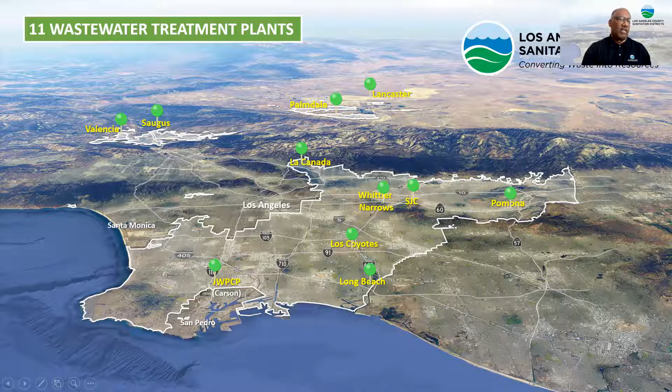So out of the 24 sanitation districts, we have 11 wastewater treatment plants. Our initial wastewater treatment plant is in Carson. Our first one came online in 1928. We call it the Joint Water Pollution Control Plant, or JWPCP. Today, we're going to focus on the Palmdale plant that you see here in the Antelope Valley. We also have a couple of treatment plants in Santa Clarita. So this will be the focus of today's virtual tour.

And what makes the Palmdale plant, as well as the Lancaster Water Reclamation Plant, uniquely challenging? Of our 11 wastewater treatment plants, these 2 in the Antelope Valley are the biggest challenge, because at the other 9 we try to recycle the water, but if we don't have takers for that recycled water, we can put it into a river or an ocean. Well, at the Lancaster and Palmdale plants, there's no river or ocean nearby, and everything flows towards Edwards Air Force Base.

And if you can see this aerial shot, you can see the closed basin. So that means that every drop of water that comes into this plant has to be accounted for, either by recycling or storage. And it makes the operation and management of the Palmdale plant, as well as the Lancaster plant, uniquely challenging. With that, I'm going to turn it over to John, and he's going to talk to you more about the Palmdale Water Reclamation Plant.

Thank you, Basil. I appreciate the introduction. All right, so I'm gonna go ahead and share my screen here with you guys.

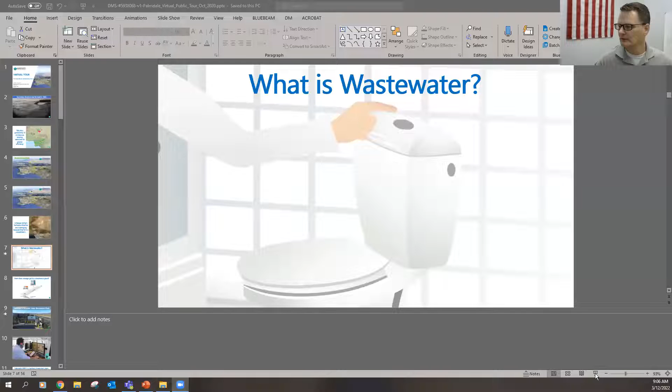And I should be unmuted. You guys see the screen okay? Yes? Yes. Awesome. Thank you.

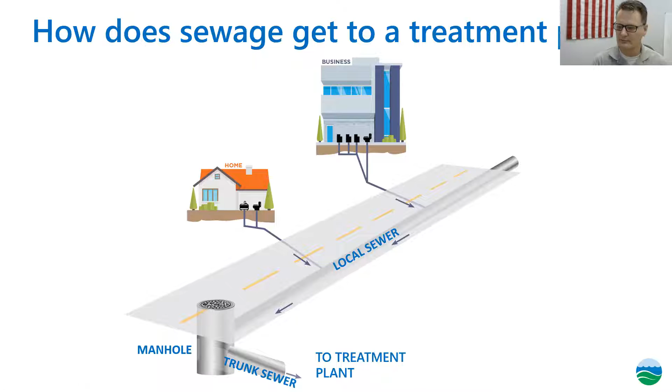And so here's a video of the Palmdale Water Reclamation Plant. A little overview. So this plant started in 1953, and the original amount of water treated was 0.75 MGD. MGD is a unit of flow, which stands for million gallons per day. So just to put a visual in your mind, if you take 140 garden hoses and flow them all at once, that's 1 MGD. And so today, Palmdale treats about 10 MGD on average.

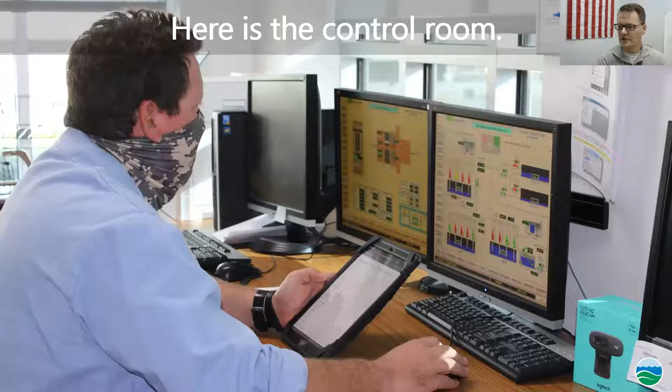All right. So start you guys off in the control room. This is an operator here holding an iPad. He's looking at a screen. If you look at the screen itself, you can see different colors, red and green and blue and black. The red means the pumps or the mechanical equipment is off. Green means that it's on. These are actually pumps that are depicted here. And this is a DCS system, distributed control system.

It's a way that an operator can control the plant from one room without having to go out to the pump and flip a switch to turn it on or off. You can also monitor the entire plant system from this DCS system and see if there's anything that may be starting to go in a direction they don't want it to, or maybe need to make some adjustments. The iPad that you see the operator holding there is used for their rounds.

So 2 times a day, an operator will walk around the plant and collect data, whether it be flow, temperature, pressure, whatever it may be. He'll collect it on this iPad and bring it back to the control room and they'll download it into a database. And then from there, we can monitor any trends or changes that may be happening in the system.

All right, so here's a schematic of the Palmdale Water Reclamation Plant. Basically in this tour, we're going to follow the water through, and we'll talk about each of these systems as we go. The first part is our primary system. Oh, by the way, there's 3 main mechanisms that are used to treat water: physical, biological, and chemical. So as we go through these systems, just think about what type of mechanism is being used to clean the water. All right, so we'll go to the primary.

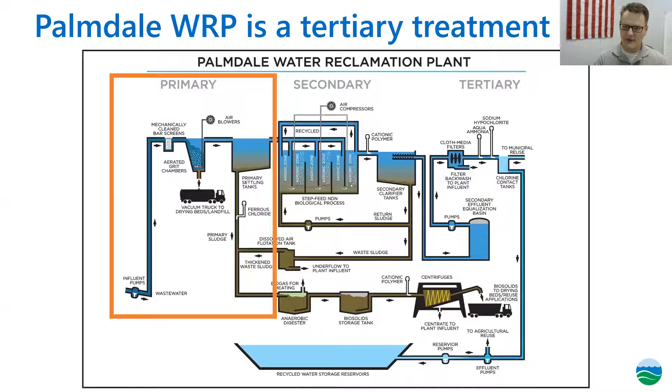All right, so I'll bring you to the influent pumps. Because the Antelope Valley is very flat and we gravity flow water to the plant, the pipes enter the plant at about 25, 30 feet below grade. And so we have to pump that water up to the surface so we can begin treating it.

And what you see on your right-hand side are influent pumps. Now, each of these pumps are rated at about 100 horsepower, and they each pump about 10 MGD. Now, you may remember that earlier I mentioned that the plant treats an average of 10 MGD, and we have 5 pumps there total. You only see 4 of them in the picture, but we have 5 of them.

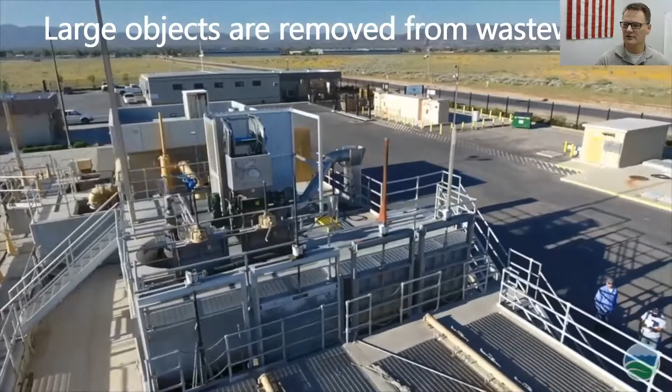Now, the plant has a lot of redundant systems throughout the plant itself, and we do that so that way if a pump goes offline, we could continue operating normally until we repair it and put it back online. So the water's pumped above grade, and then the first part of the treatment is the screening structure, as you see here. And the purpose of the screening structure is to remove large objects from the water. And we'll get a close-up of the screen itself.

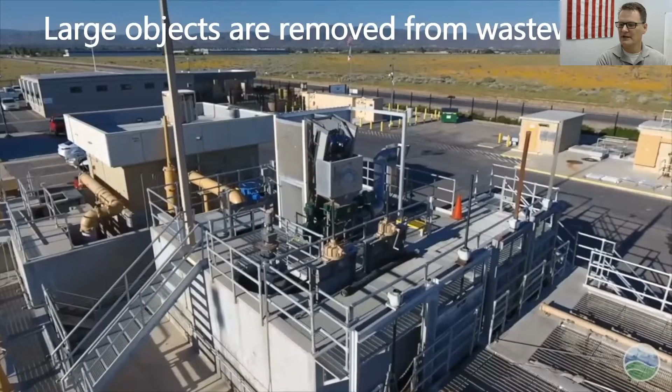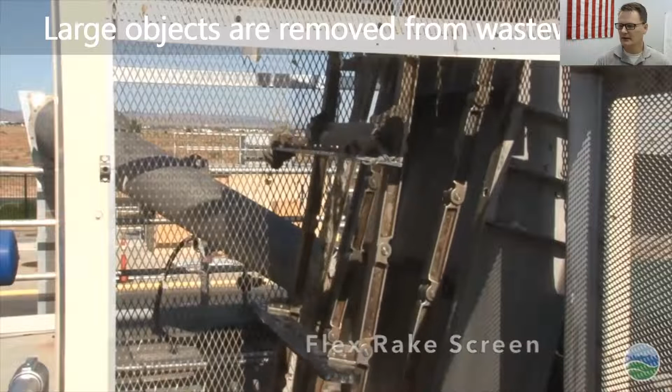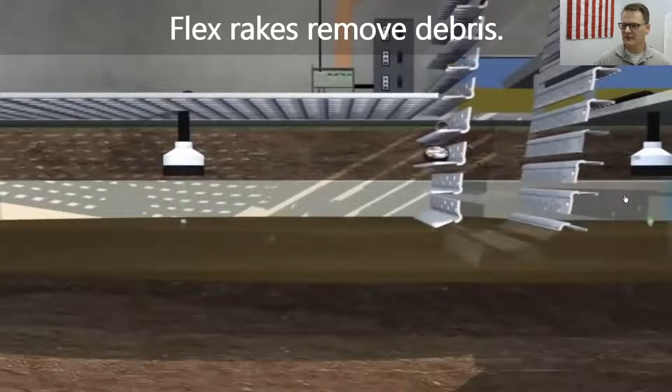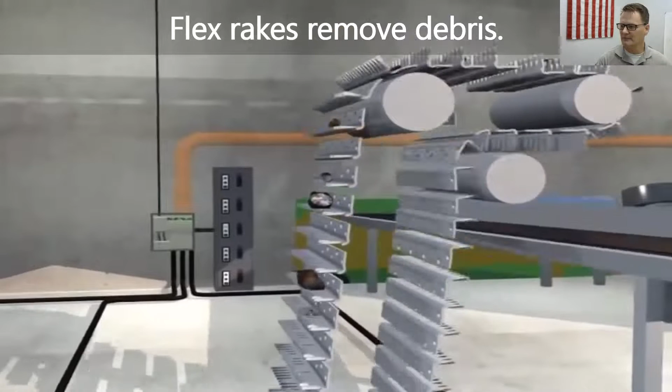Here's our flex rake. And so what happens is the water flows through this flex rake, and we've got a graphic here. It kind of shows a side view. You can see the water kind of flowing to the right, and then the flex rake kind of captures these larger objects, conveys them up. And then in this graphic, it drops it down into a conveyor belt, but we actually use a washer compactor at this particular plant. And here's what that washer compactor looks like.

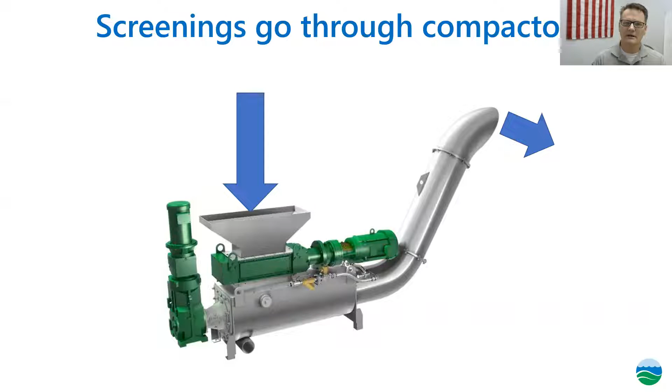So it gets dropped into that bin that you see here, and then gets compacted and pushed out to the right. And so here's what it looks like. And as you can see, there's a lot of rags in here. And we want to mention that, as you see, it's a public service announcement. We don't want to put flushable wipes down into the toilet. And the reason why is because they don't disintegrate.

And so this is an additional load or additional cost on your wastewater treatment plant. And so we want to avoid these costs if we can, because obviously those costs get passed on to our customers, which is you. And so if we could minimize the amount of flushable wipes that we put down the sewer system, that would be very helpful. Also, let me ask you this question. Maybe somebody out there knows this, but what else should we not put down into the sewer system? Anybody want to hazard a guess?

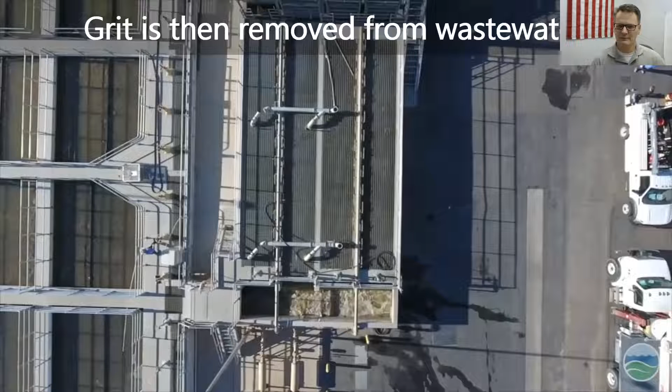All right, continuing the tour, the next step in the process is the grit chambers. We have a little video here. The purpose of grit chambers is, just as the name indicates, to remove grit.

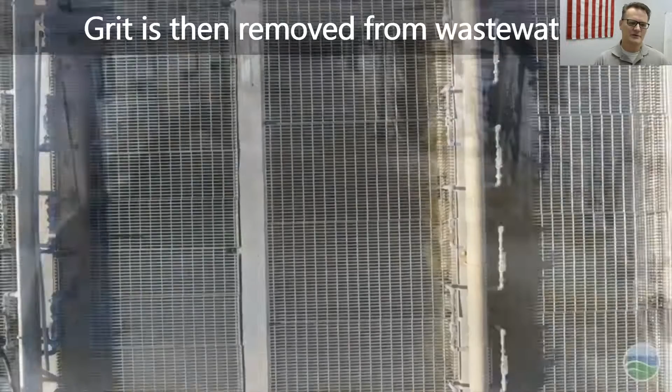If you remember at the beginning we showed a picture of the bathroom and a shower. If you shower or do laundry, you can get grit in the water, and the purpose of the grit chamber is to remove that grit. We remove the grit at this stage because we want to protect downstream equipment.

This grit is very sandy and abrasive. An analogy I like to use is if you have a bicycle chain, you don't put sand in it because that would destroy the chain and the sprockets. That's why we remove grit at this stage, so that we protect our downstream equipment.

As you saw from the video, the water moves fairly quickly. We just want to settle out the small dense particles at this stage, and then carry the water on further down the treatment system. As you can probably tell, this is a physical process we're doing at this stage.

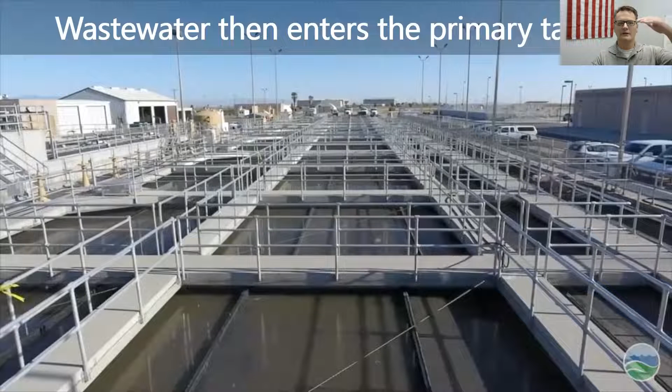All right, so next is the primary tanks. This is where we slow the water way down, and we get stuff to float and stuff to sink, so we can start to separate out the items that are in the wastewater we receive.

So you can see this overview of the primary tanks. Down here you can kind of see some boards along here. These boards are called flights, and they run on the top of the water and also on the bottom. They move very slowly, and they collect everything that floats and everything that sinks, and that's then transported over to the digesters for further processing.

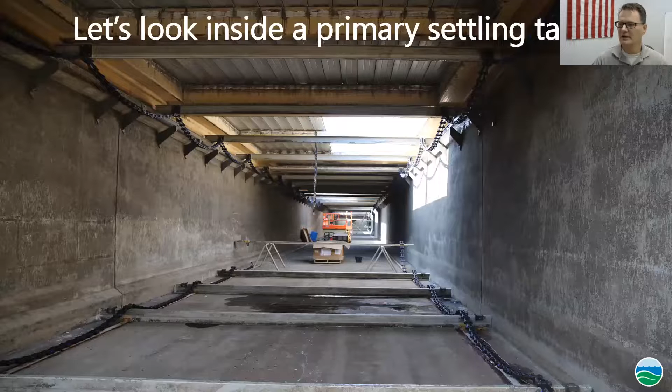I have a picture of a primary tank that's empty here. At the bottom you can see the flights, and some chains along here, a chain-and-flight system, same above. Right now maintenance is doing some work to this particular channel to keep it running.

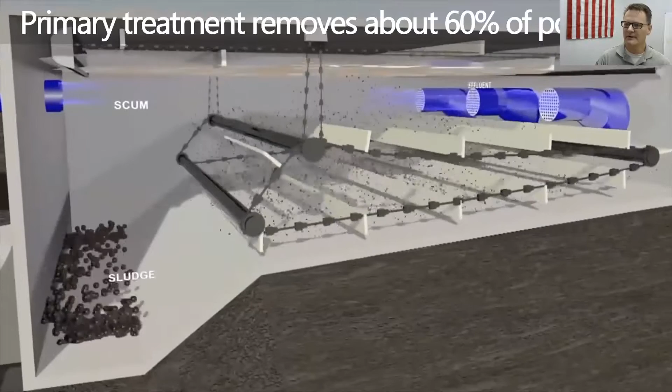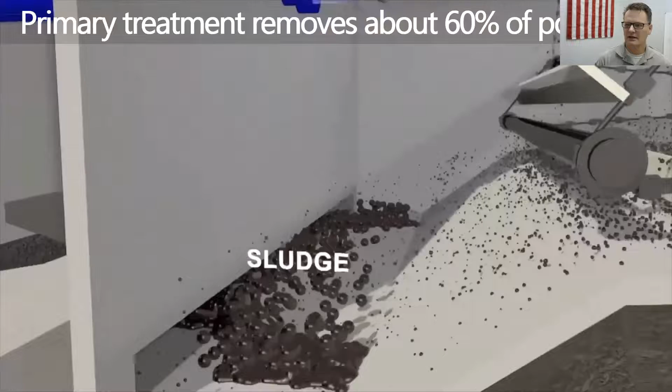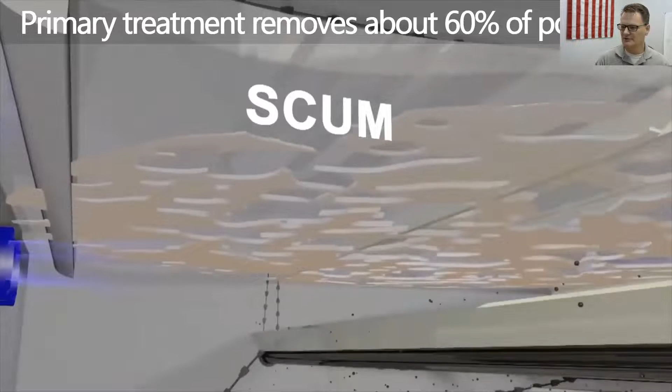I think I have a graphic also, here it is. You can see a graphic where the collection system is collecting sludge on the bottom, and also on the top, and all that sludge is then collected and transported to the digesters for further processing. We'll show you pictures of digesters and talk about that in a few minutes.

One thing I want to mention is that when people think about wastewater, they think it's yucky and disgusting. But it's really not the water itself that's disgusting, it's what's in the water that we want to remove or don't like. The process of the wastewater treatment plant is to remove all that stuff out of the water, and at the end get clean, usable water that we continue using for other sources.

Water is obviously a valuable resource, and we want to recover and use it. Water is just a conveyor, it transports our waste to the plant where we can then treat it, remove the waste, and reuse the water.

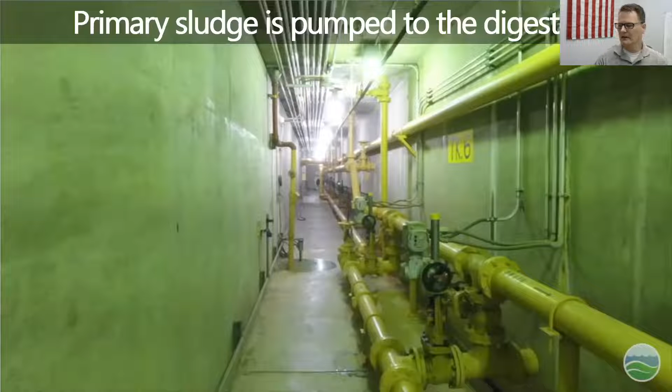This is the gallery down by the primary tanks. On the right you can see a placard, this is tank 6 that you see here. Down below you see a pipe, and that's where sludge is being collected from one of the tanks.

And so these pipes then convey the sludge over to the digesters, as I previously mentioned.

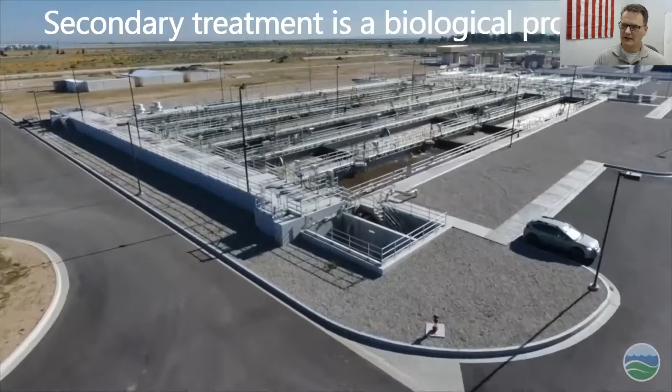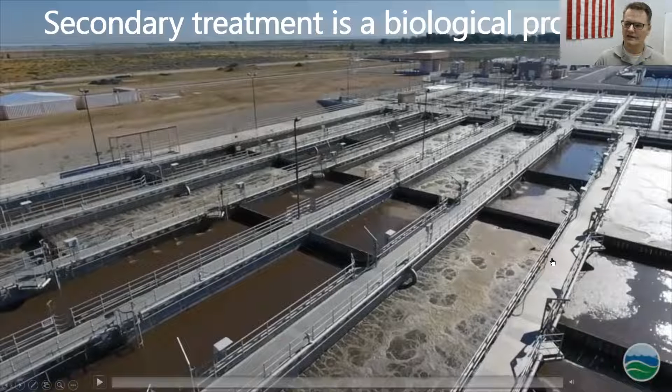Okay, so next we'll go to the secondary treatment process here. This is the biological treatment, considered the heart of the treatment plant process. As you can see, there are some tanks that are bubbling or aerated, and some that are not. This is because we use a process called the NDN process, the nitrification denitrification process, to remove dissolved waste in the wastewater.

At this stage, we have done all of our physical processes that we could, and now what we have is dissolved waste in the water. So to remove this dissolved waste, we employ microbes to go in and eat the waste. We have a variety of microbes that go in and eat the waste, removing it from the water itself.

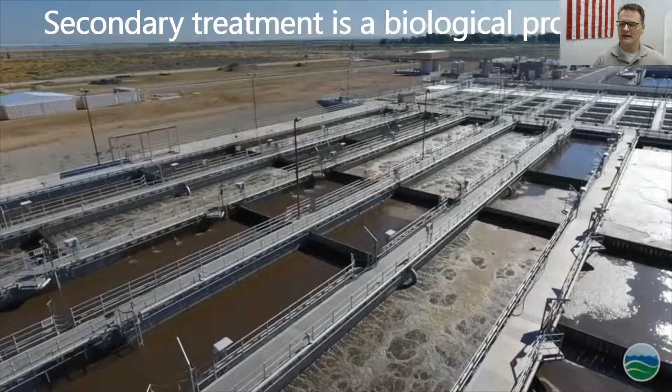On this NDN process, we have some tanks that are aerated and some are not, because we're trying to promote growth of certain types of microbes that do certain types of work. We want to nitrify our ammonia, then denitrify it, and eventually convert it into nitrogen gas, to where it's no longer an environmental issue at all. The water spends about 4 hours in this process.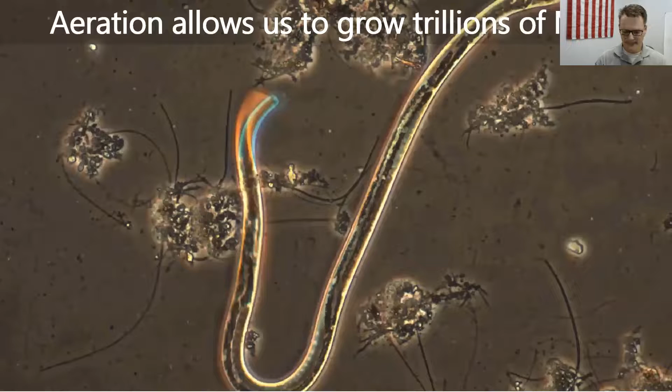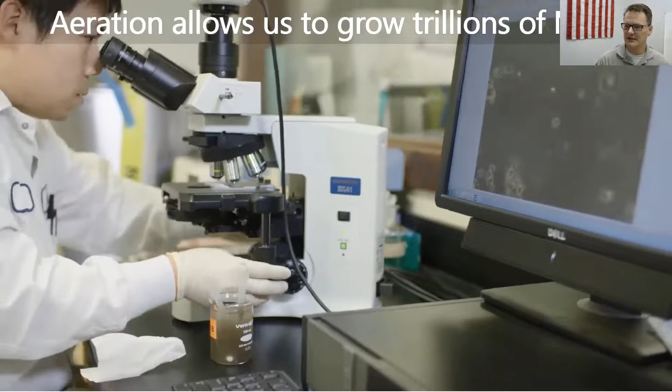Here you see a lab technician looking at the microbes. You can look at the microbes and actually tell the health of your sludge just by seeing the variation you have. You want many different types of microbes in your wastewater treatment plant, because there are many different types of waste that the plant receives, and you want those microbes to eat that waste.

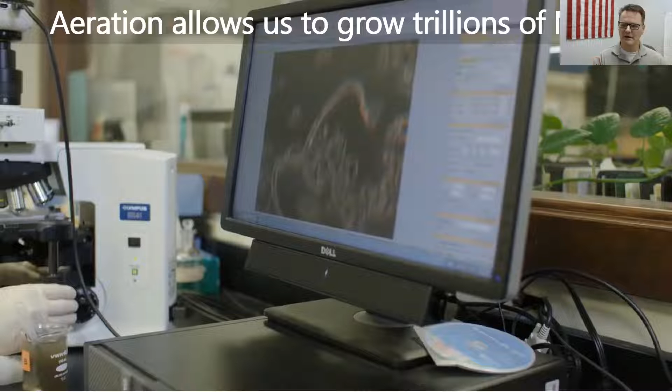An analogy I commonly use is like at a buffet. If we all go to a buffet, we all like different things—some people like pizza, some like salad, and we'll gravitate to those types of food. These microbes gravitate to the types of waste they like first and eat that up. So if we have a variety of microbes in there, we can get all our waste taken out of the waste stream.

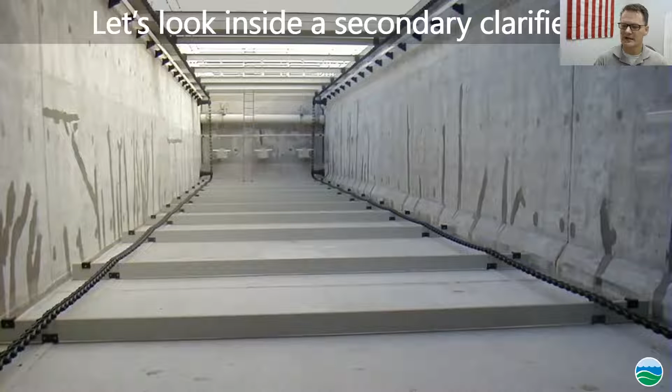Here's the inside view of the tank. As you can see, it's very similar to the primary tanks you saw earlier. You've got the chain and flight system, and these boards—they go on top of the water, and also underneath, and they collect the microbes.

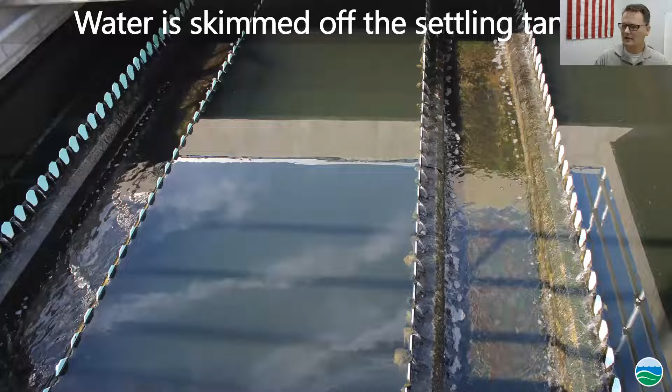And here you can see the water being skimmed off. So in the secondary settling basin, just like the primary settling basin, we slow the water way down. We want these microbes to settle out, and lucky for us, they're just a little bit heavier than water. So we settle them out, and we slowly skim the water off the top from there out.

Even at this stage of the process, the water is fairly clean. Here's a picture of the water that has been skimmed out of the secondary settling tanks.

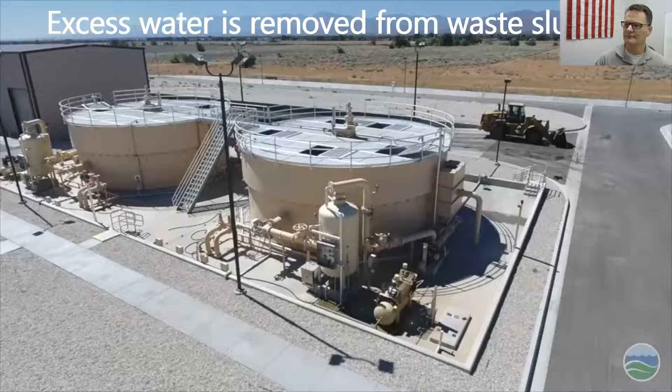The microbes that are taken out are then sent over to these DAFs, the dissolved air flotation units right here. The purpose of the DAFs is to remove the excess water. From here, they go to the digesters. We want to remove the excess water because we don't want to take up space in our digesters with that water—we want to use all the space for treating the microbes.

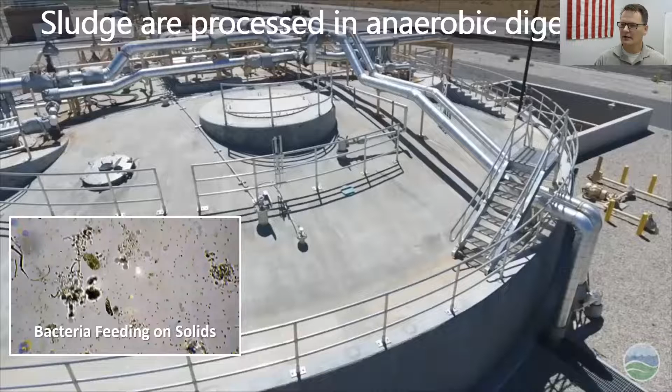Here's the digester itself, and you can see a video of the bacteria feeding on the solids in the lower left-hand corner there.

You see a lot of pipes in the digesters. These pipes serve different purposes: some are conveying sludge to the digesters, some are conveying sludge out, and some are collecting gas like methane that's produced. That methane is then reused in our boilers to reheat the digesters. We keep the digesters at about 98 degrees, and that helps digest the solids we collect.

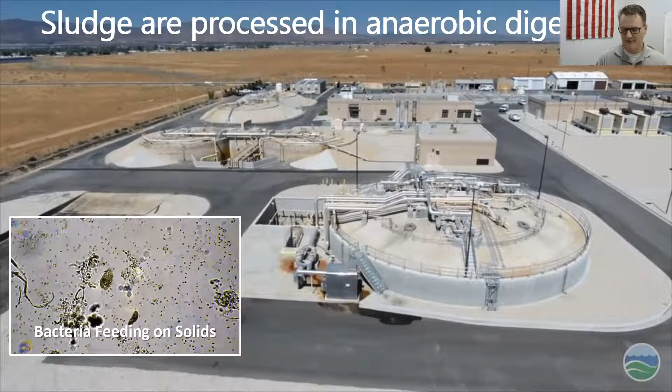After the digesters, the sludge is sent to the dewatering building where it is dewatered. There are two purposes for this. The first is to reduce the volume by removing the water. The second reason is that water is weight, and we have to transport the solids out. We don't want to pay hauling costs for hauling water out. We only want to haul out the solids.

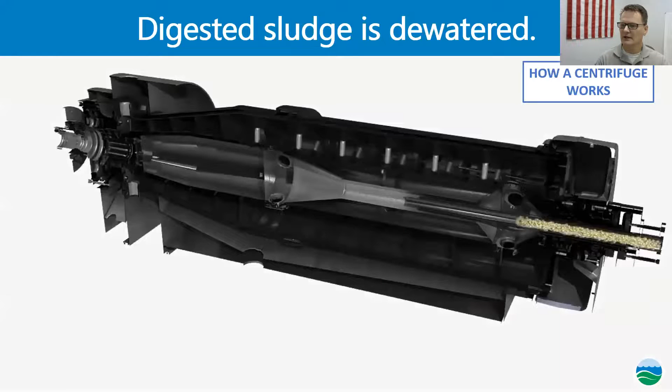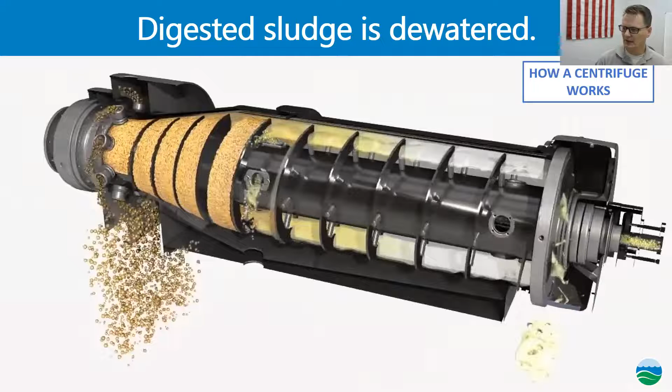Here's a video on how the dewatering centrifuge works. The sludge enters on the right and goes down. It's spun really, really fast, kind of like your washing machine on spin cycle, except it spins much faster. The solids are pushed out to the front, and the water to the right. The water that comes out is called centrate, and that's pumped back to the front of the plant for additional processing.

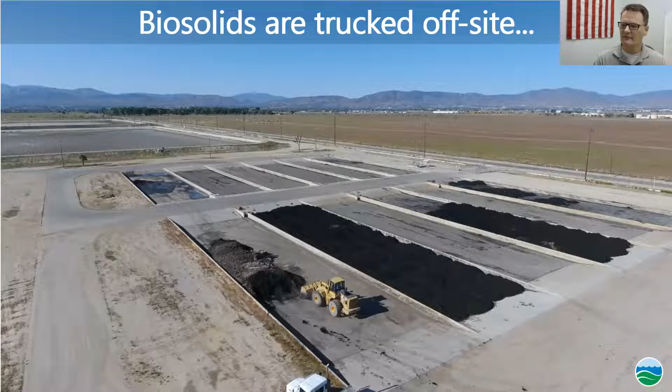The biosolids are then collected and stored at our 40th Street property, where you can see the piles of biosolids. They're stored there for a period of time, and eventually they're hauled off and composted, as you can see here. So it's beneficially reused.

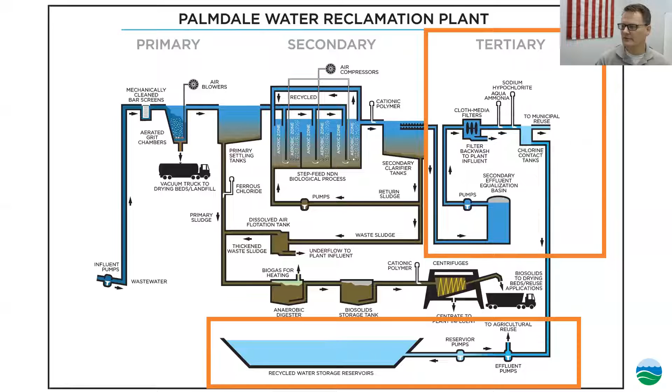Next we're going to go on to the tertiary part of the treatment plant. Here we have the equalization basin. Got a video of it here, and that's a 5 million gallon tank.

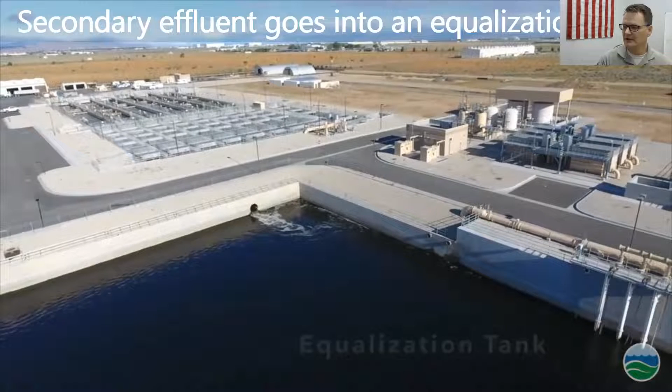The purpose of the equalization basin is, just as the name says, to equalize the flow. The wastewater treatment plant typically sees highs and lows of water coming in throughout the day. It's all based on human activity. During the day, people get up to take showers and eat breakfast, getting ready for work, so we see an uptick of water coming in. Later in the day when everyone's at work, the water may go down, then go back up again when they come home and are taking showers or eating dinner. So the water goes up and down.

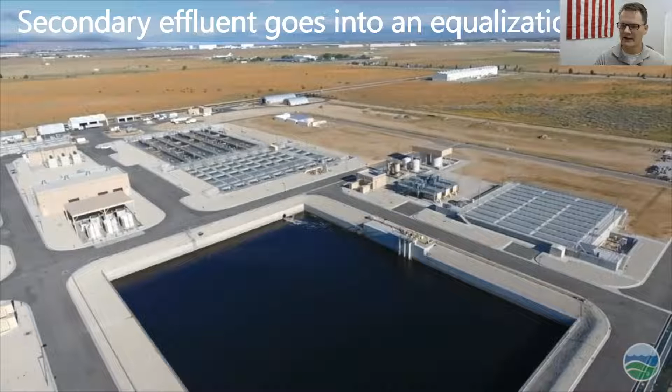The secondary equalization basin serves two purposes. One is that it can be emergency storage. If we have an issue on the back half of the plant where something breaks and we need to store water temporarily while we do a repair, we can use this basin as a fail-safe to store water for us.

The second reason is to smooth out that flow. Rather than having the flow go up and down, we can have a steady flow going through the second half of the plant. This matters because when we do disinfection, we want to disinfect to a certain point and maintain that level. If the water is going up and down, we're always chasing it. But if it's steady state, we can zoom in on it, which helps save money on chemical costs and makes it easier for operators to run the plant.

So I got a quick question for you guys. What do you think is the busiest day, or the day we get the most flow at the wastewater treatment plant?

We got Jackie and Juan saying Super Bowl Sunday, and Lily saying holidays. Yes, there are two big days for us. One is Thanksgiving, since families get together, doing a lot of cooking and activity, so we see a higher amount of flow that day. Also during the Super Bowl we see a lot of flow, and you can even tell when it's halftime because there's a little uptick then. Barbara asked about Mondays. That's a good question. I'd think Mondays see more people going back to work than, say, a Tuesday, Wednesday, or even a Friday. Janine, what do you think? Do we see a bit more flow on Mondays than on a Friday?

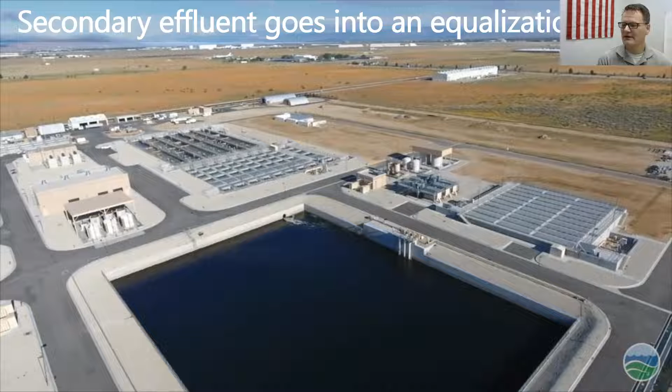After the secondary equalization basin, it then goes to the filtration process. We want to filter the water at this point to collect any microbe stragglers that may have made it through the secondary process, or anything that may have gotten into the water up to this point. This is right before the disinfection stage, so let's talk about the filtration.

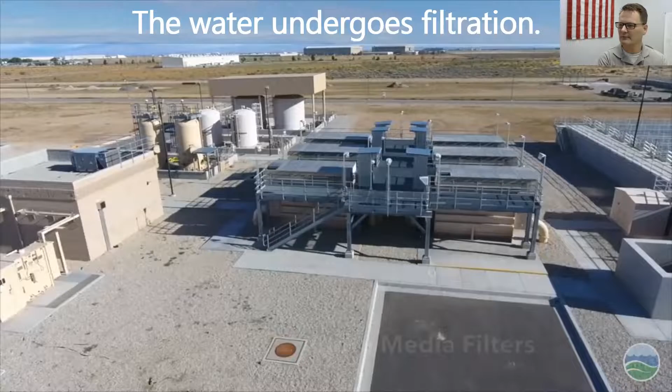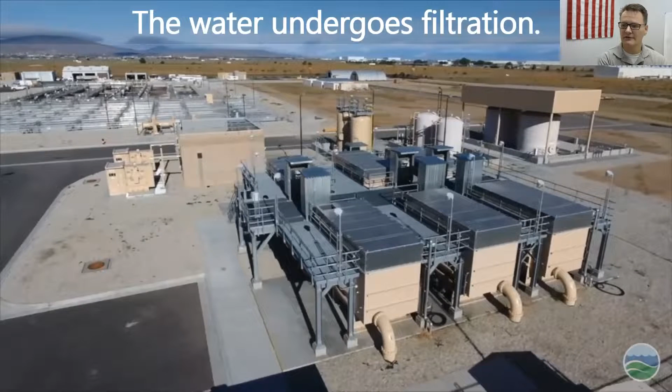At Palmdale, we use cloth media filters for our filtration. Other plants may use gravity filters or pressure filters. There's different ways of doing the same thing. So if you're in a different city and visit their wastewater treatment plant, they all do the same thing, they just do it differently.

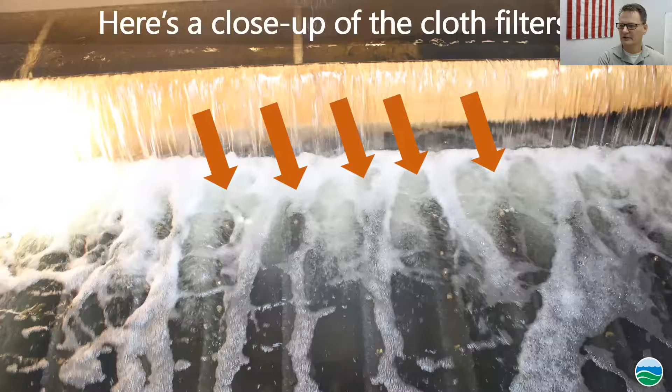Here's a close-up of the cloth filters themselves. You can kind of see the water cascading down into the filters. And I've got a video here that shows how they work.

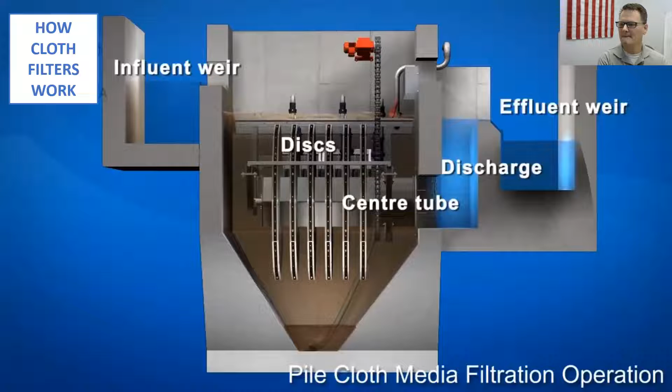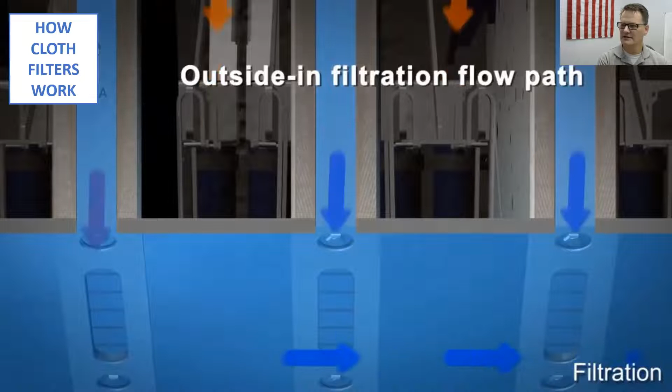The water fills up and then it goes into the filter segments, comes down, and gravity flows inside the filter itself, then through this pipe in the center, and out into the next process.

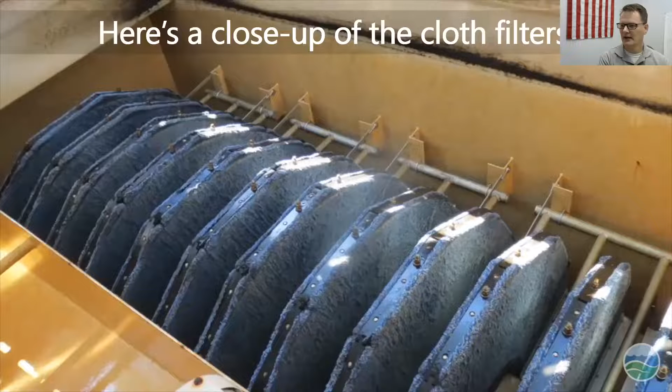Here's a close-up of the cloth filters themselves. You see they're just discs, a bunch of discs in line, and here's a close-up of what one looks like.

If you're here for a physical tour, which we plan to resume in the very near future, we bring these out and you can actually put your hand on it and see what it feels like. If you rub your hand on it, it feels very much like carpet, very soft and fuzzy.

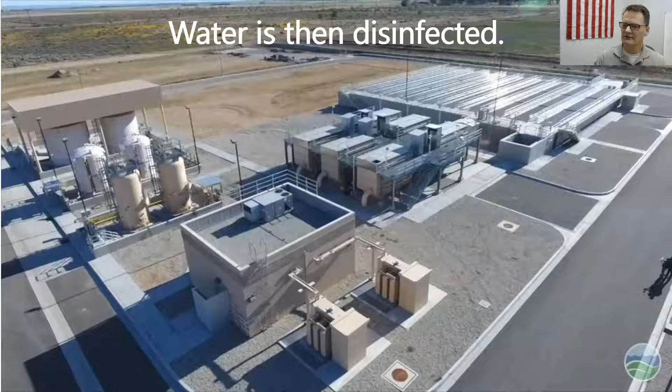All right, so after the filters, then we go to disinfection, the chlorination tanks.

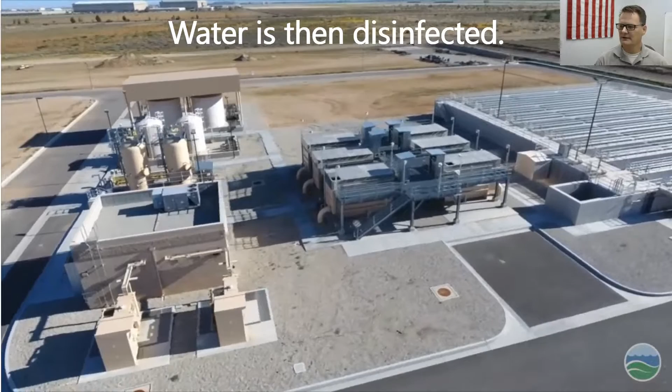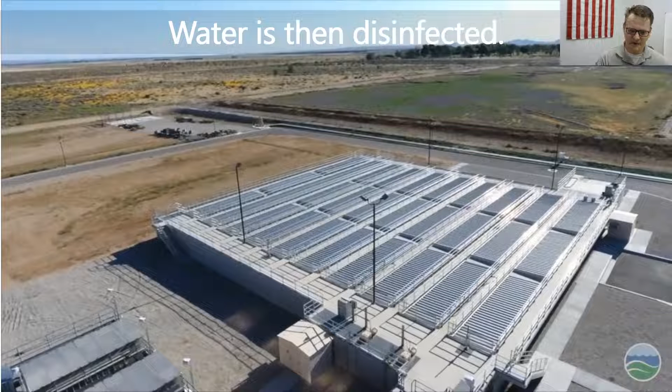Here's an overview of the disinfection tanks. The water spends roughly about 4 hours in these tanks for disinfection. We put chlorine in here and maintain a contact time, and after that contact time, the water is disinfected.

Here's another shot. Does anybody notice that we have these tanks covered, but maybe not the other tanks in the treatment process? Anybody have any idea why? Anybody want to take a guess? Anybody out there have pools?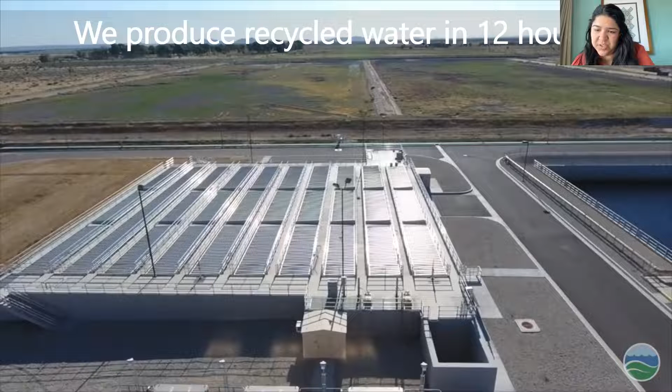So we have Juan who says the sun doesn't eat the chlorine, Ava says to prevent things from falling in, Lily says so it doesn't evaporate, and the last one says to prevent particles from going in and contaminating it. Yeah, all three. The biggest benefit is the evaporation of chlorine. Chemicals are a major cost in a wastewater treatment plant, so we don't want to put chlorine in there and have it evaporated by the sun. By having these covers on there, it's a cost savings measure to keep the chlorine from evaporating, and it also protects the water from any debris or anything that may get dropped in the tank. Yes, very good, thank you very much.

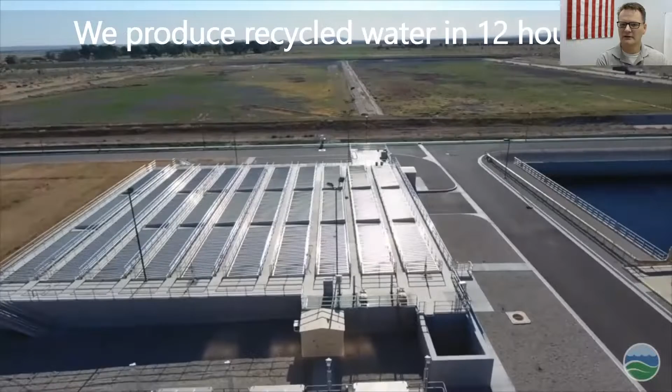Okay, here's a video of it, and here's the water itself as it's coming out. You can see it's very clean at this point.

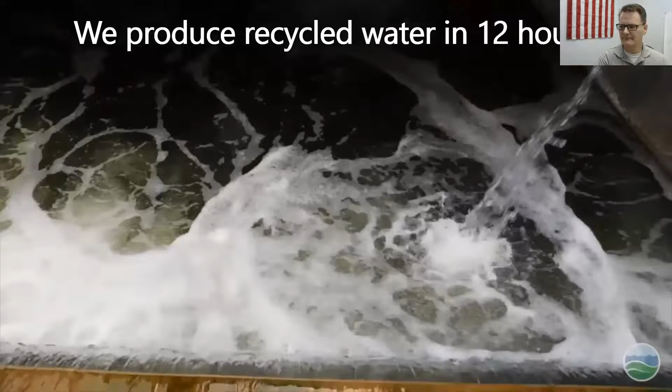So again, the challenge for our Antelope Valley treatment plants is a closed basin. So for the Palmdale plant, here's the water reclamation plant where my cursor is at, where the arrow is at. And then all the water has to be managed on land. The plant is completely surrounded by Los Angeles World Airport's Palmdale Regional Airport. So we've entered into a lease for land around us, and we sublease that land to farmers. And as you can see from these circles, we're using this water to irrigate fodder crops.

But in the winter months, when it's raining or evaporation rates are low, or the farmer doesn't need water, we have to store it per our permit. And the closest piece of land we could find to build storage reservoirs is all the way over here. So we have 2 storage reservoirs, these diagonal looking things. They can store almost 1 billion gallons of water, and we pump that water when we can't use it. We pump it all the way over here, miles and miles away. It's literally a 45-minute drive from the treatment plant, and we store it there until we need that water.

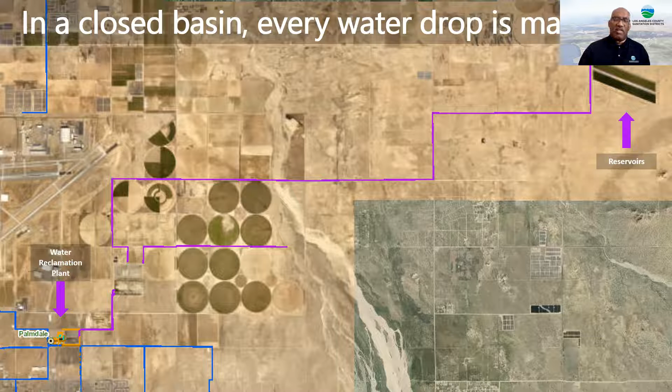And let's take a drone look at these storage reservoirs. So you can see the storage reservoirs here. They're quite long, and we store the tertiary effluent when it can't be used, and it can handle up to almost 1 billion gallons of water.

Most of the water from the plant is used for agricultural irrigation. Here's a close-up shot of the center pivot irrigation that we have around the plant. We have about 1,700 acres of land that's irrigated with recycled water. When most people are flying over Middle America, they see these crop circles, and these circles are created by these center pivot arms. I think you have a little video. So in the middle of, let's say, a quarter section, you have the center, and this arm rotates like a clock's arm, and the irrigation tubing drops down, and that's how the farm is able to irrigate using the recycled water.

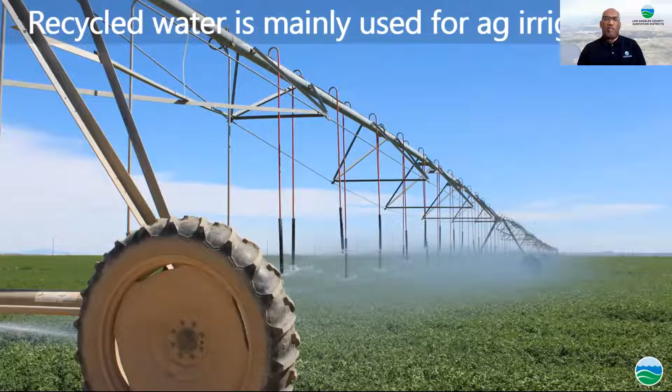And here's a close-up shot of the center pivot irrigation system. You see the wheels, you see the nozzles where you're irrigating the fodder crop. So most of the water from the Palmdale plant is used for agricultural irrigation. A small portion is also used to irrigate McAdam Park in Palmdale. And we irrigate at agronomic rates, so we irrigate at a rate that the crops can take up that water, and whatever is left over is stored in those reservoirs I showed you earlier.

So that kind of tells you the whole Palmdale story from beginning to end, the water coming in. We treat it in about 10 to 12 hours, and then we use it for recycling. We use it for agricultural irrigation mainly, but whatever other uses pop up, we're really open to that. We use that water for that.